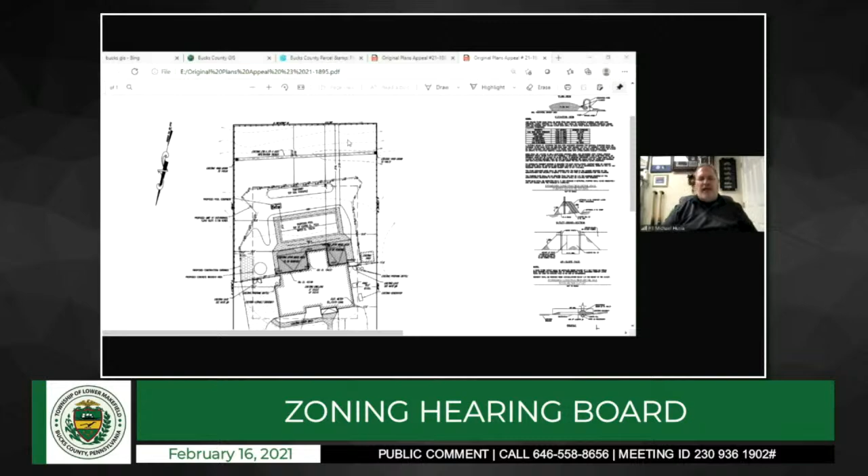And to further answer the question about the shed, that was existing when I moved in, and it will be removed as part of the cleanup of the property. It's pretty run down and it's not proper in the first place. It's a metal shed and it's rusted and it'll be removed. Thank you.

Appreciate that. Jim, does that impact the impervious calculations and get them out of needing that extra 10 cubic feet? It would be minimal.

Yeah, it looks like water from the property all goes to that rear yard there, and property from behind them also rolls down into that low spot. So my guess is that's why there's an infiltration trench there. I agree with Matt, I believe that. You see the infiltration trench across the whole yard there.

And if I may answer Peter's question, the removal of the shed will reduce the impervious surface down to about 22.6% roughly. Does that mitigate out the need for going to 170 cubic feet?

All right, fantastic. So if the board was to so move, we probably would have moved that you could use the infiltration trench contingent upon removal of the shed. I agree with that. Will the township be participating in this? No.

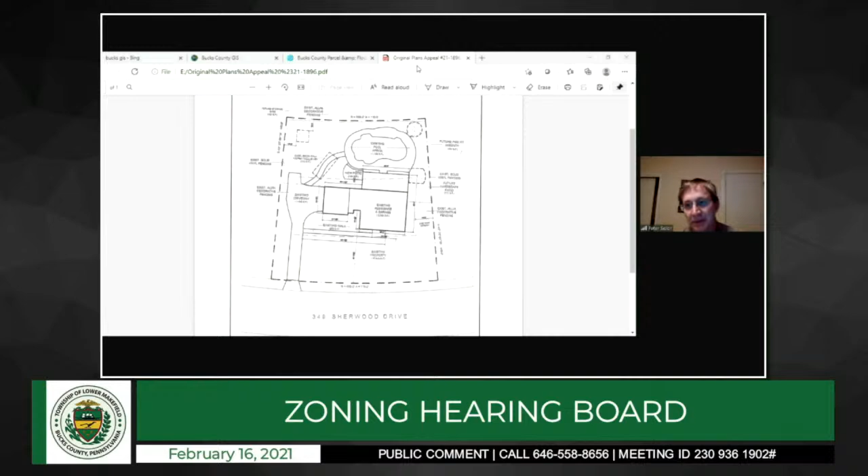I'm uncomfortable with - I see what you're doing - the existing, the future hardscape, not comfortable with that. I understand the fire pit back there, but in that driveway, I don't see any reason why you can't get rid of all that portion. I mean, you're high, you're real high. I know you're better, I got it. But that's high, how can you help?

Well, I mean, what am I supposed to do? I mean, seriously, I bought the house, and I'm thinking that I got a beautiful pool in the backyard, and I can't even do anything. No, that's not true, you got a beautiful pool in the backyard. So, yeah, here's the thing.

You're asking for a future fire pit, two added patios, a shed, on a site that's already over impervious. Why don't you take this back, think about it till the next meeting, and see if you can consolidate some of this down. Look at maybe filling in some more of the existing driveway and kind of tighten this up, because as it stands, I don't think this is going anywhere.

So let me ask you this, what can I do back there? I mean, you're looking at it, you see the plan, take the pit out, take the hardscape out. I mean, what can I do? Well, that would help you get through tonight. If you took the hardscape, the fire pit, the future things you do, and that angled portion of the driveway back to the flag portion out, I think that number - we could probably ask Jim what that number would be if those things were removed.

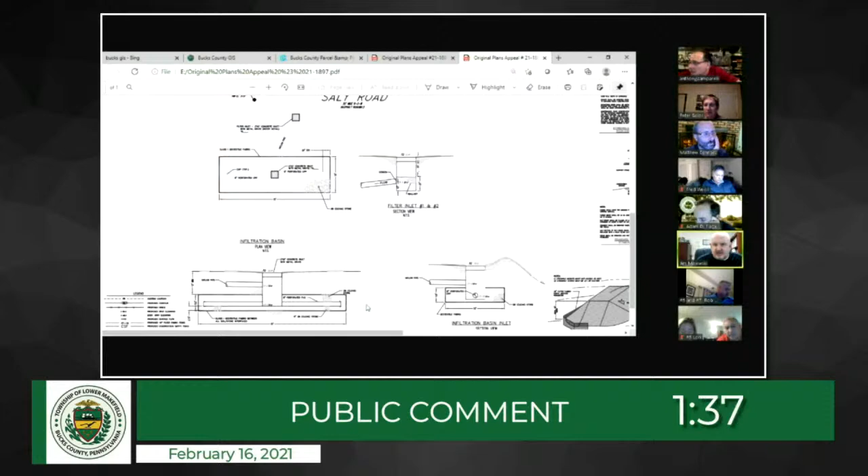When it comes up on your screen, you'll see this is sort of a cut view into the ground, as if you're looking through the earth. Below ground, there will be a bed with pipe and stone, and water will go into that and be stored underground and percolate. On the lot, that will be towards Michael Road a little bit on that side of the property.

So any runoff would be heading towards Michael Road, is that correct? It'll be collected through a series of yard drains on the property and then put underground, on the left side of the property if you're looking at the house, towards Michael. What is being proposed is actually going to be less runoff than there is now.

Yeah, I mean the house, if I'm standing on Michael Road, the house to the left of this property is my property. So am I understanding you correctly that that's the way it would run off, or it would collect over there? It should collect over there. Do you have runoff on your property now?

When it's really bad storms, all the way in the back, let's say—trying to get my directions here—the northeast corner, back around there, sometimes there's some standing water. Jim, could you comment on that? It looks to me like it would reduce that runoff, but am I mistaken?

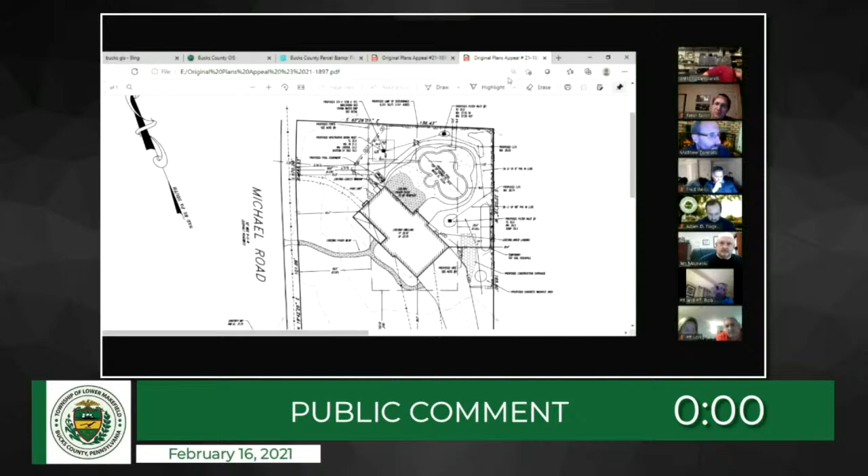It's encouraging to hear that it's going to go down to 13%. That's very good. The only other question I have—I don't know anything about this, first time I've sat in on one of these hearings—if there were any problems in the future, what would be the solutions to that?

When they do the construction, our township engineer will check on it to make sure everything looks okay. If you see a problem when construction is well along and they're finishing up, and you see water washing over in your direction, let the township know and we'll work with the pool installer to see what they can do to make it better so it doesn't impact you and your property.

Yeah, it's just, a year, two, three years from now, if there's a problem, what kind of redress does anybody have for decisions on zoning variances?

Well, like Jim just said, that design was based on our experience, and of course Mr. Majewski's as well. This usually makes it better, even for your other neighbors. So our experience will be improved. I know you're concerned, and that's fine.

There's always something. Go ahead. Yeah, no, I trust you guys, and I trust the neighbor to do the best for everyone else. It's just more of an informational thing—what is redress for property owners if variances are approved and in the future they turn out to be bad approvals?

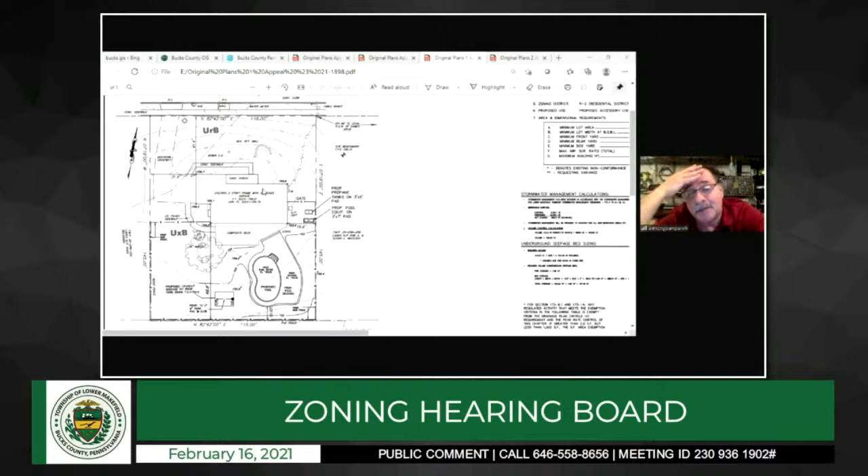Those dimensional issues they're mentioning, I'm not sure the exact code, but sometimes those little pads are exempt, but I can't say that for sure. But they are right, if there is an issue with that, it does sound like you would be agreeable to move the pad, so it's not going to be a dimensional issue with the neighbors. No, that's fine, that's not a problem. And typically the township requires that pool equipment be a minimum of 5 feet from the property line. From the property line, okay. Yeah, I thought so.

All right, anybody public comment? One public comment, bringing them in now. Okay.

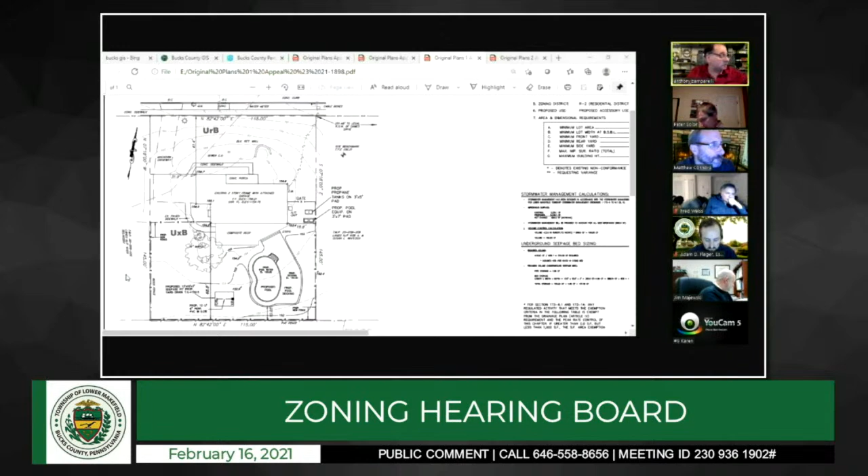Do we have any other public comment? No further public comment. Okay, all right, that being said, I guess we're looking for a motion, right? Mitigating this back all the way to 18% or to 19.8%?

Make a motion to approve appeal number 21-1898, subject to approval of the stormwater management plan by the township engineer, mitigating it back to 19.98%, and subject to relocation of the proposed pads to be in conformance with all code requirements. Do I have a second? I'll second. Any discussion? Being no discussion, I'll ask for a vote. All those in favor? Say aye. Aye. All those opposed? Since no one's opposed, the motion carries. Thank you. Thank you.

All right, okay, my screen changed for some reason, but I'm not opposed to it. Okay, we're on what looks like our last appeal. And this one? Appeal, the Schaefer? Yes, yes, appeal... 21-1898, is that right? No, appeal 21-1899, Mike and Melissa Schaefer.

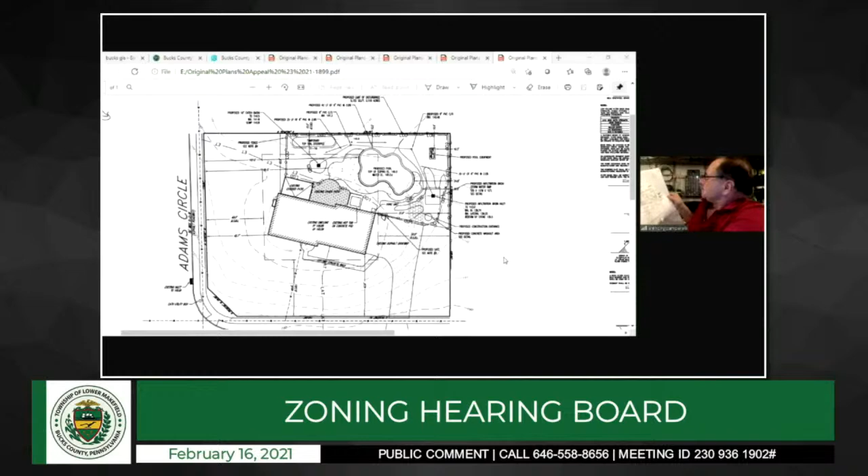Is there any issues on the left side of the house? I'm looking... No, there appears to be a little bit of a swale to the left side going onto Adams, but the majority of it's captured by these little area drains, which I really like, and brought over to that infiltration basin.

Peter, are you comfortable with this? I'm comfortable with this, sorry, I'm muted. No, it's okay. Any public comment on this? No public comment.

I don't see an issue. That was my only issue because it was so far over to the right. I think it's a nice little design. It does look pretty good. Thank you. Yeah, you seem to be doing good now that we've seen you a few times.

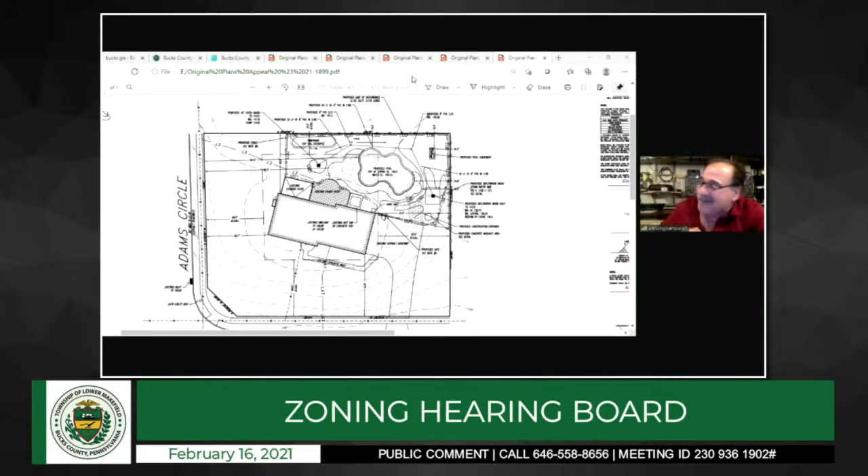That being said, and there's no public comment, and the township's not involved, I'll ask for a motion.

I'll make a motion. Where is it? 21-18... 21-1899 to approve, subject to installation of a stormwater infiltration system back to an effective rate of 18%, subject to review and approval with the town or by the town engineer.

Jim corrected those numbers to 18.5%, was it Jim? 18.5. Thank you, Peter. Also, Matt, if you can just add the number they're asking for, the 25.0%, to your motion, just so it's clear for the record. Well done, I'll correct it.

Do we have a second? Second. Any discussion? Being there's no discussion, I'll ask for a vote. All those in favor, say aye. Aye. All those opposed, say aye. Nobody's opposed. The motion is carried.

Thank you very much, really appreciate it. I like the designs. I did too, I was impressed. I got to tell you, that face. That was all Rob, I saw the plans. Wait a minute, these look awful familiar, these two plans. I thought maybe it was a copy and paste situation. No, it just happened to work out because they were kind of similar, I looked at it a couple of times. Wait a minute, is this the same one? Hold on, we do look at it. Okay, excellent. Thank you very much. Appreciate it, everybody. Have a great night. You too.